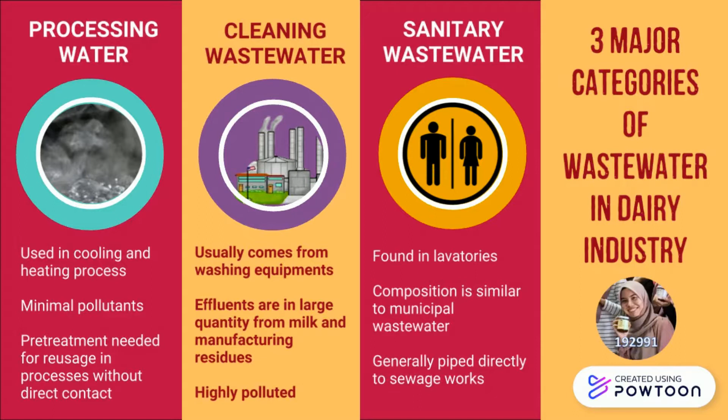The last category is sanitary wastewater. It is found in lavatories. Its composition is similar to municipal wastewater, and this sanitary wastewater is generally piped directly to sewage works. In this presentation, we are going to focus on the cleaning wastewater in the dairy industry.

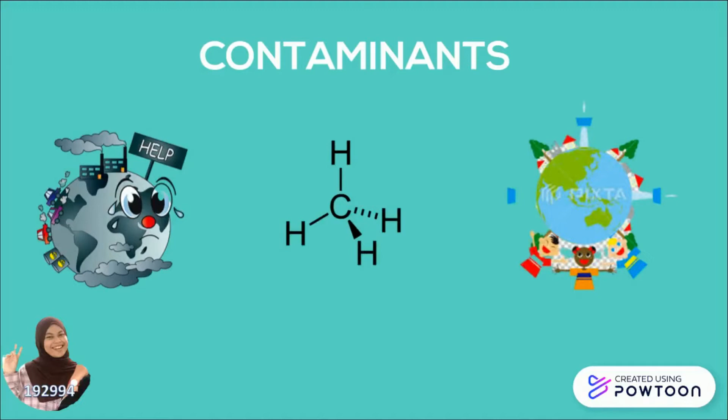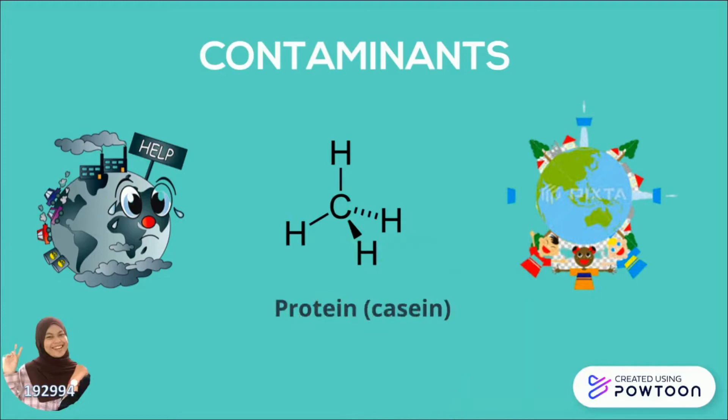Dairy industry is not commonly associated with severe environmental problems. However, we must consider its environmental impact, as dairy pollutants are mainly of organic origin. Waste from the dairy processing industry will contain high concentrations of organic material such as protein (casein), carbohydrate, lipid, and high concentrations of suspended solids.

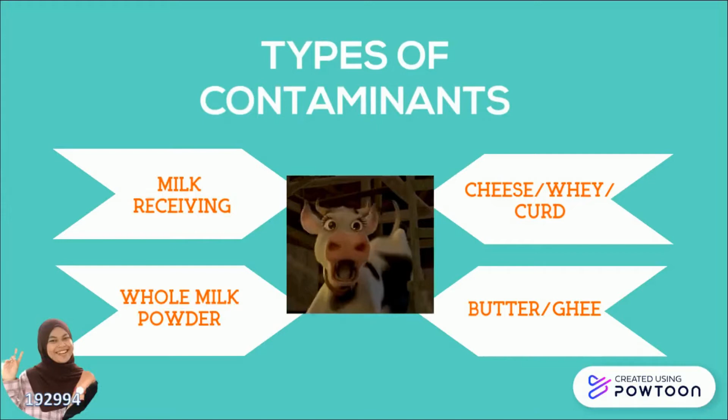Here are several types of contaminants from the dairy industry: milk receiving, whole milk powder, cheese or whey or curd, and lastly butter or ghee.

The type of contaminant can be sourced from milk receiving. It can result from tank, truck and storage tank washing, pipeline washing and sanitizing. It also contains milk solids, detergent, sanitizers and milk waste.

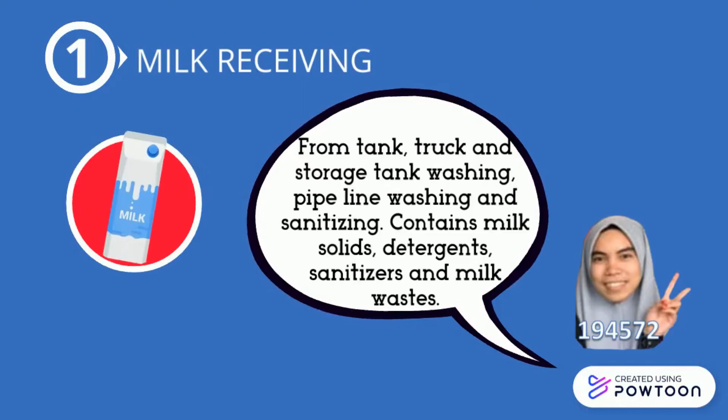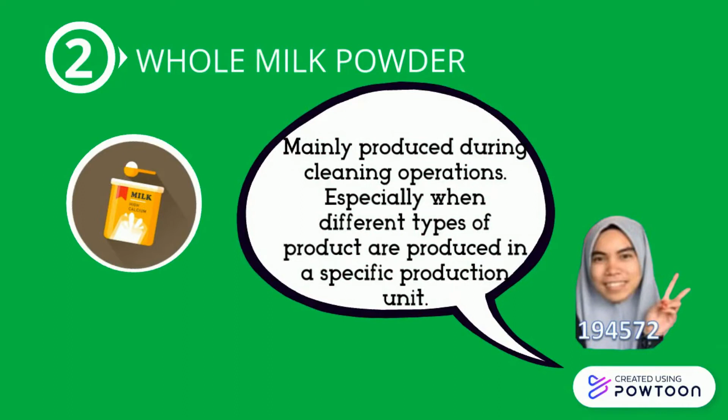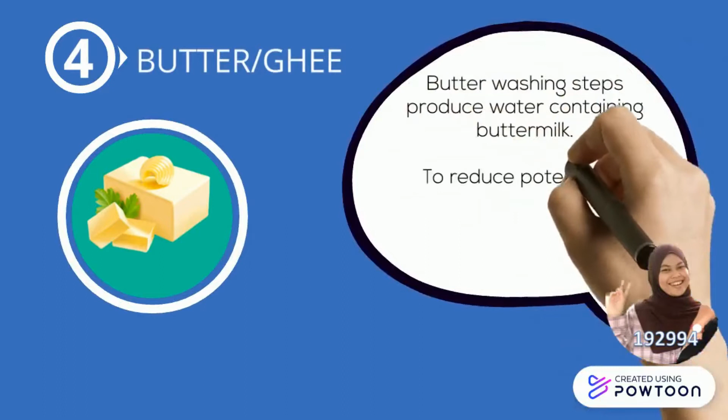Lastly, for butter or ghee, the butter washing step will produce wash water containing buttermilk. So, to reduce the potential waste load from butter or ghee, we can eliminate the buttermilk production and the washing step.

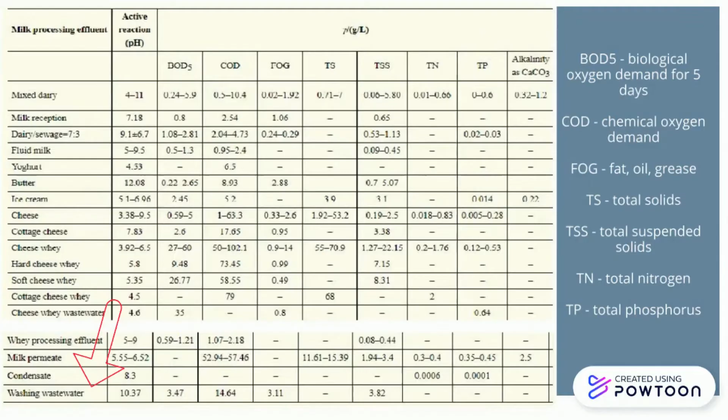Hello, I'm Akila and I will explain the on-site pre-treatment options in dairy wastewater treatment. There are four main points here: first, physical screening; second, pH control; third, flow and composition balancing; and the last one is fat, oil and grease removal.

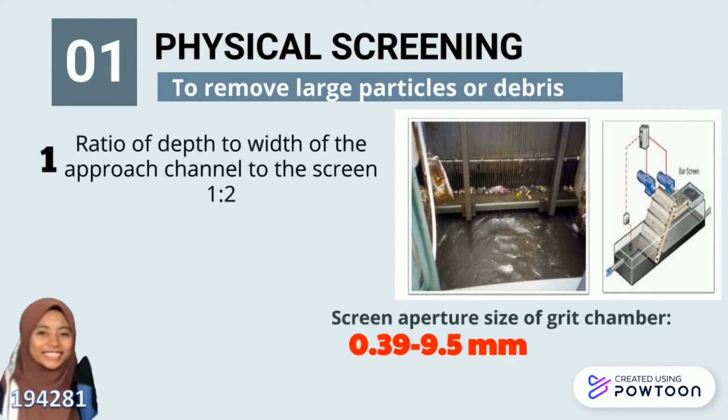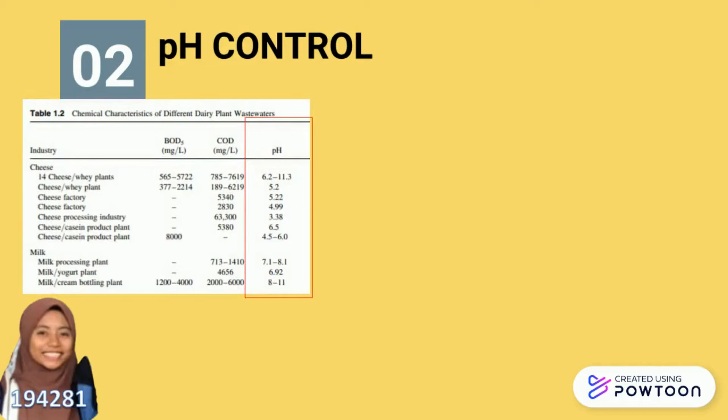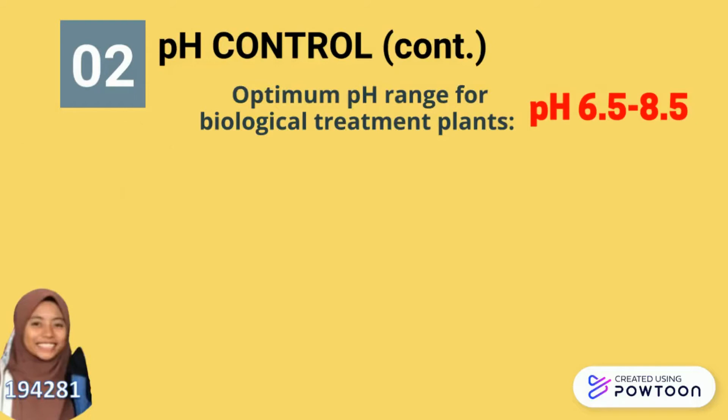As we can see in the table here, there are large variations in wastewater pH from different dairy factories. Therefore, different cleaning strategies can be employed, such as alkaline detergents and acidic detergents, and both have different functions. The optimum pH range for biological treatment plants is between 6.5 to 8.5, and if extreme pH is used, it will be detrimental to any biological treatment facility.

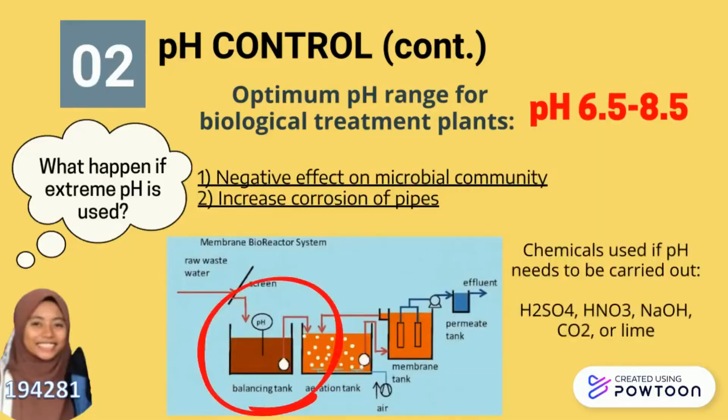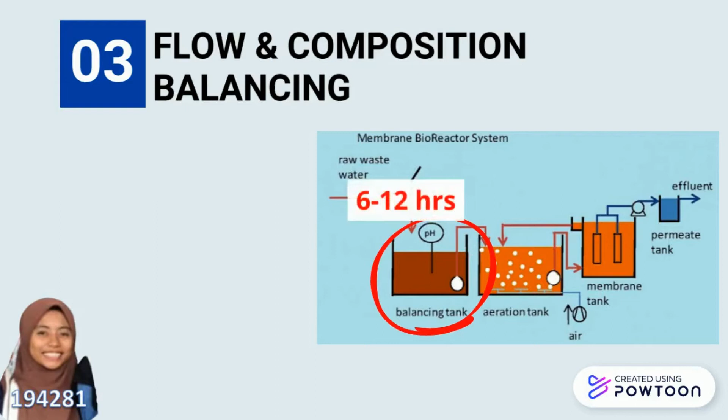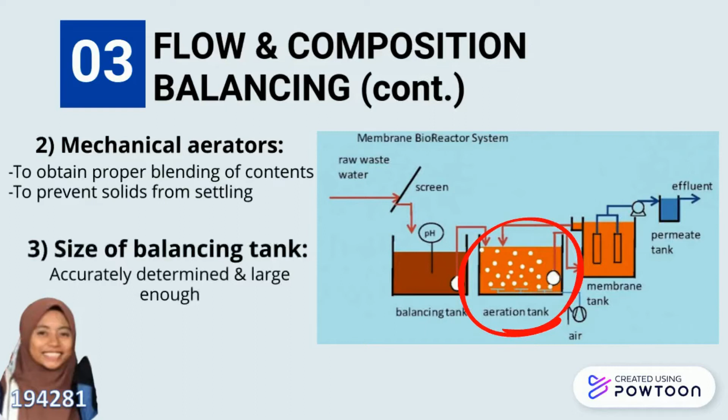Usually, flow balancing and pH adjustment are performed in the same balancing tank. This can be achieved by keeping effluent in the balancing tank for at least 6 to 12 hours. During this time, the residual oxidants will react completely with solid particles and neutralize the cleaning solutions. Besides, the usage of mechanical aerators is also important to obtain proper blending of content and to prevent solids from settling. Another critical factor is the size of the balance tank, which should be large enough to handle a dairy factory's daily flow pattern at peak season.

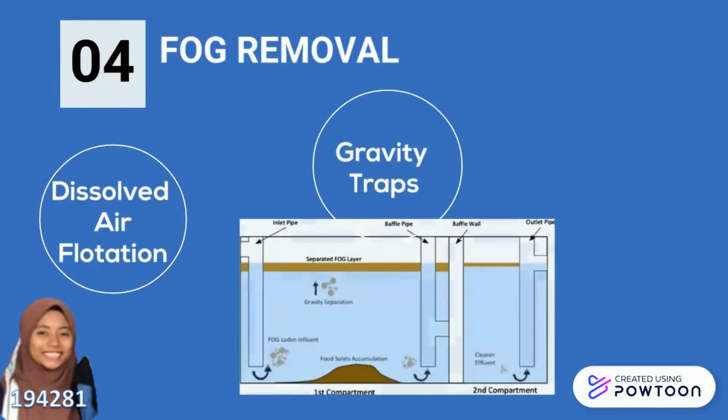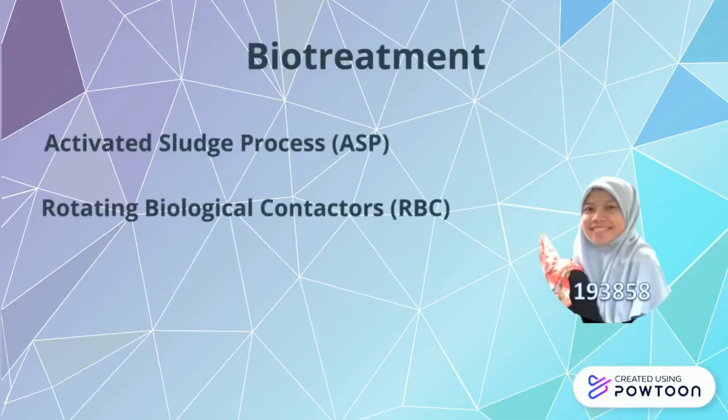The last pre-treatment option is FOG removal. FOG can be removed by three systems: dissolved air flotation, gravity traps, which use gravity separation to remove the FOG layer, or enzymatic hydrolysis. Dairy wastewater is generally treated with biological methods such as activated sludge process, rotating biological contactor, sequencing batch reactor, and continuously stirred tank reactor.

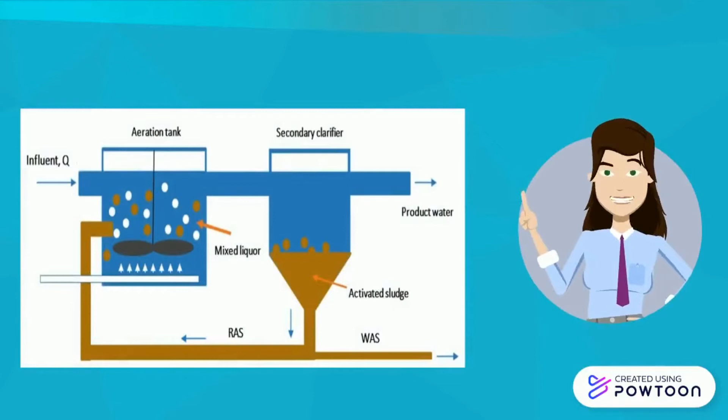First, let me explain about activated sludge. In activated sludge reactor, aeration and mixing can be provided by pumping air or oxygen into the tank. The microorganisms oxidize the organic carbon in wastewater. The floc formed in the aerated tank can be removed in the secondary clarifier by gravity settling. Some of this sludge is recycled from the clarifier back to the reactor.

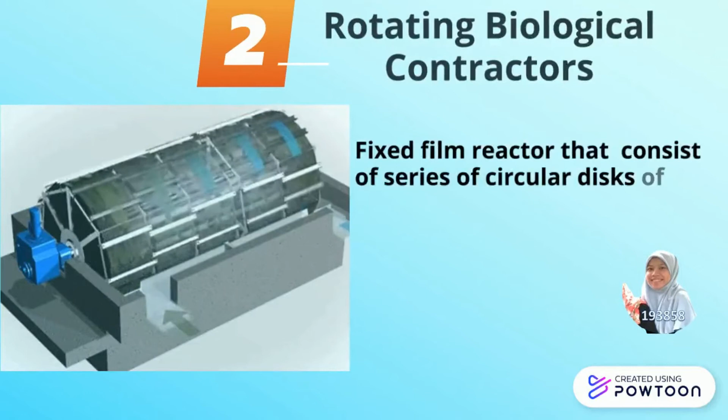RBC is a fixed film reactor that consists of a series of circular discs of polystyrene or PVC. The function of RBC is to reduce organic matter. The microorganisms present on it will absorb organic matter when they are in water, and obtain the required oxygen to grow when they are out of the water.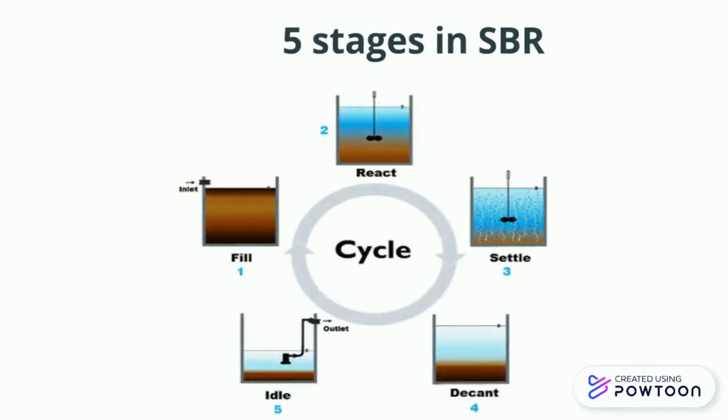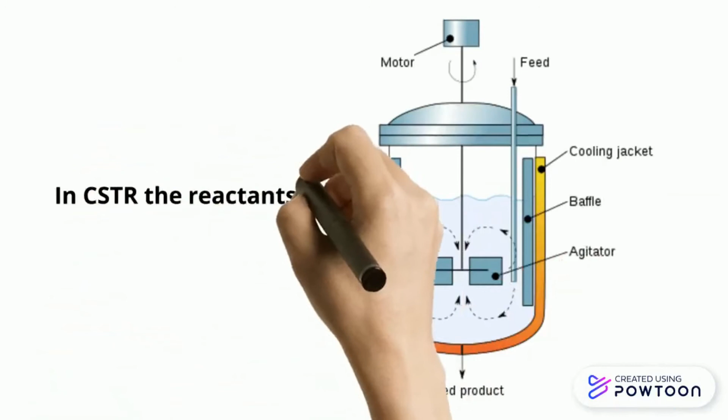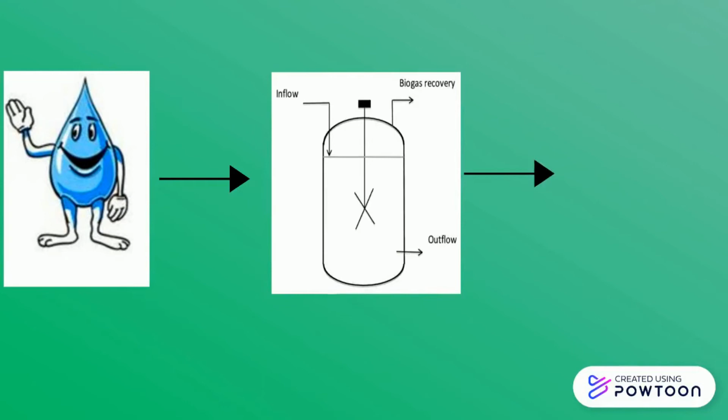Lastly is the continuously stirred tank reactor. Liquid waste stream enters the reactor and is treated by anaerobic suspended bacteria. The majority of the solid is converted into biogas, which reduces the solid concentration in the waste stream.

Here are the comparisons of biotreatments.

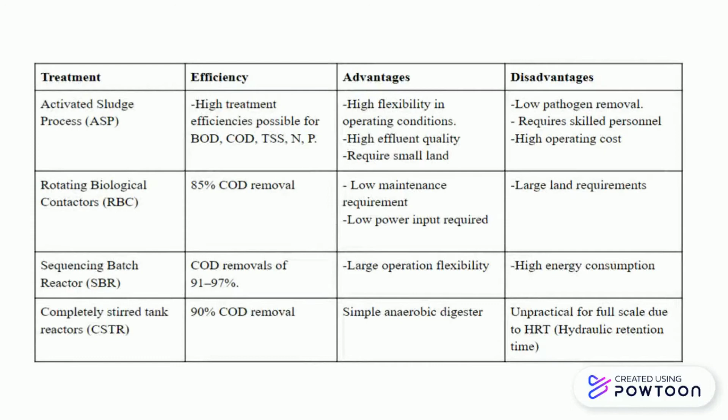Moving on, we will take a look at other treatments done in dairy wastewater. The first one is land treatment.

Interest in land application of waste is also increasing as a direct result of the general move of regulatory authorities to restrict waste disposal into rivers, lakes, and the ocean.

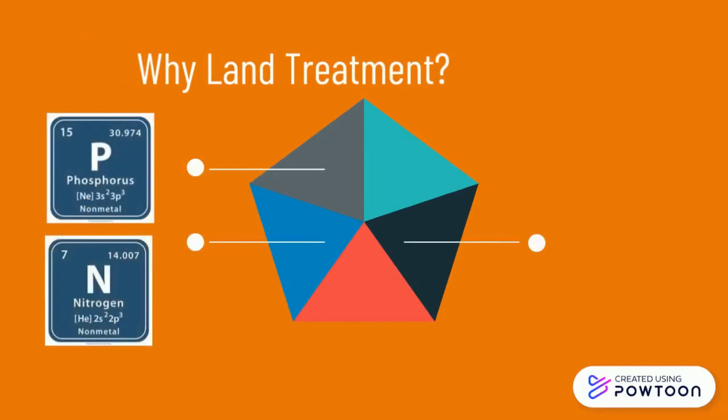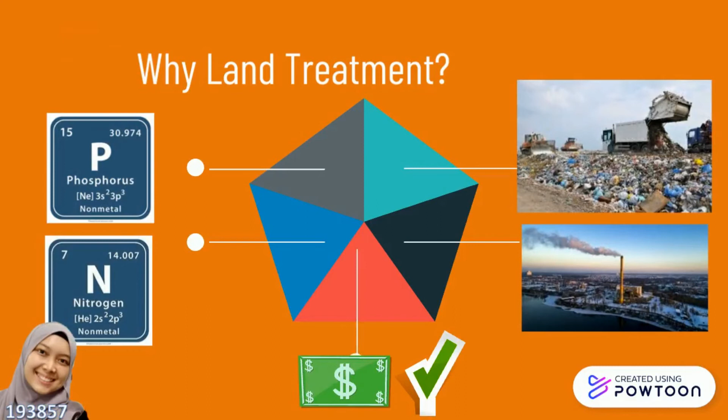There are a few reasons why land treatment is the preferred method in treating dairy wastewater, such as nutrients like nitrogen and phosphorus contained in biodegradable processing wastewater, which make these wastes attractive as organic fertilizers. Also, the high cost of incineration and landfilling makes land treatment the more economical, environmentally friendly method.

The last but not least is irrigation. Irrigation is an action to supply water to land or crops to help growth, typically by means of channels.

Considerations on the condition of the wastewater have to be taken. For example, suspended solids in the wastewater can cause nozzles to be clogged and render the soil impermeable.

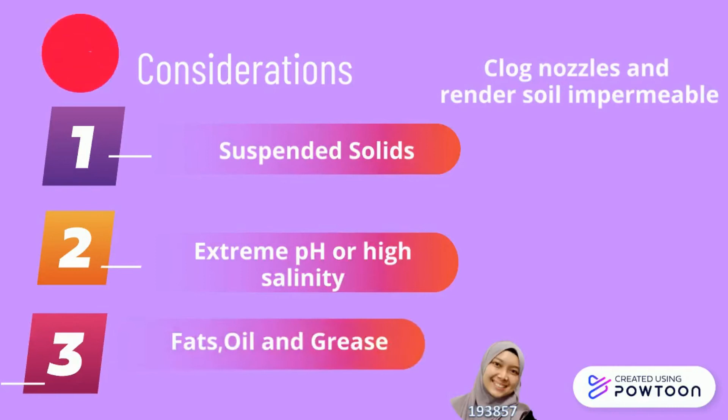If the wastewater from the dairy industry has extreme pH or high salinity, it will lead to soil dispersion, a condition in which the soil is vulnerable to erosion. And lastly, fats, oil and grease contained in the wastewater may be resistant to degradation.

Preventive measures can be taken to reduce water consumption and contaminants in dairy wastewater. Collect and reuse the wastewater for lower grade products, such as in animal feed.

Segregation of effluents from sanitary installations, processing and cooling systems helps facilitate recycling in wastewater. Regular maintenance of fittings, valves, seals and equipping fillers with drip and spill savers helps reduce spillage and prevent build-up of milkstone deposits.

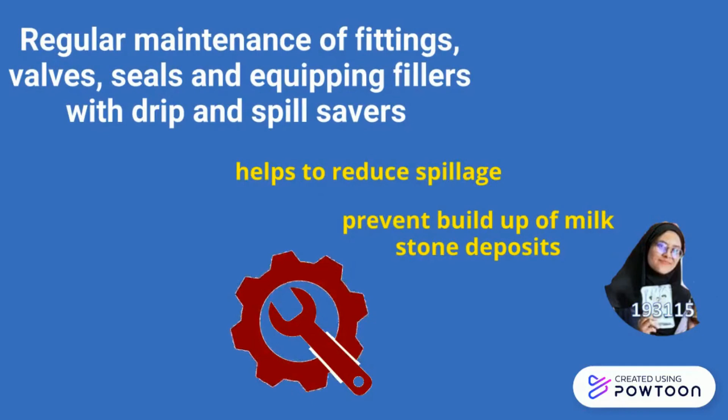Make sure to run the operation to specified length to prevent blockage in tubes, high pollutant load, and time-consuming cleaning.

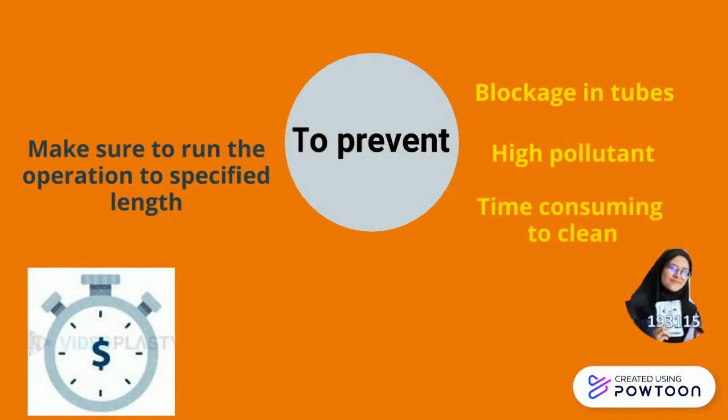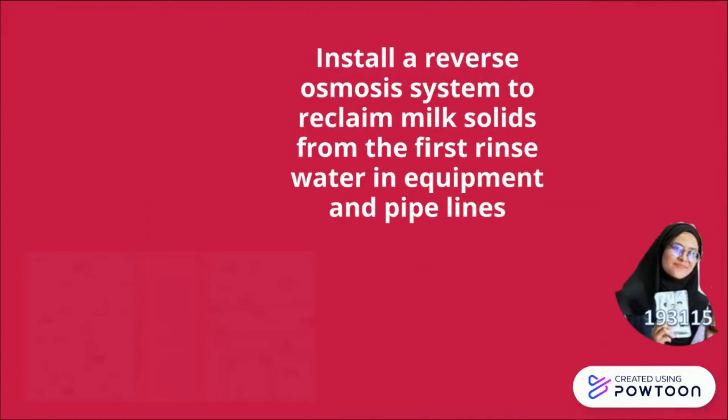Treat solid residue as solid waste instead of flushing it down the stream with water. Install a reverse osmosis system to reclaim milk solids from the first rinse water in equipment and pipelines.

An example of prevention in butter production is scraping manually to the accessible area after production, which helps reduce the amount of cream and butter from entering the wastewater stream.

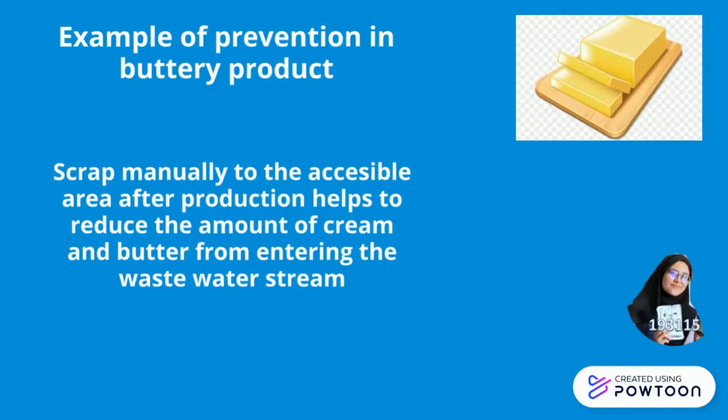In conclusion, dairy processing plays a big role in contributing to the source of wastewater. Dairy wastewater is white in color and has an unpleasant odor and turbid character.

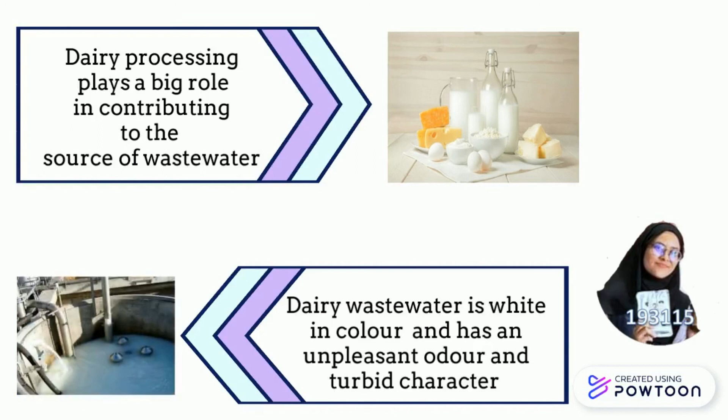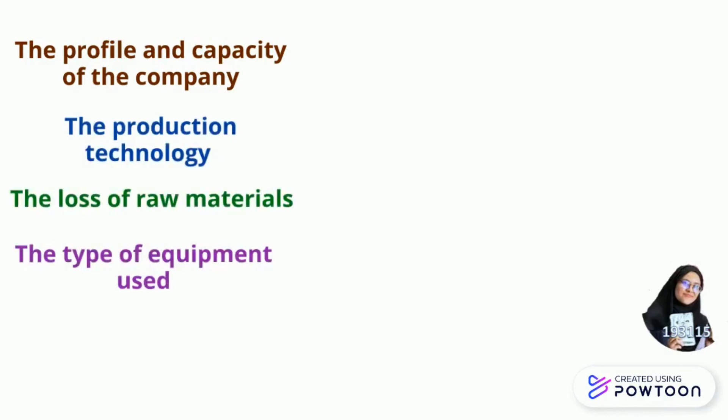The profile and capacity of the company, the production technology, the loss of raw materials, the type of equipment used, and the degree of wastewater reuse influence the concentration of polluting dairy effluent.

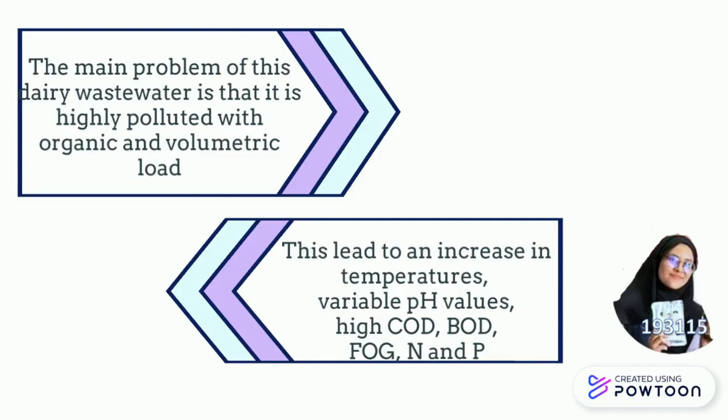The main problem of dairy wastewater is that it is highly polluted with organic and volumetric load, and this leads to increased temperature, variable pH value, high COD, BOD, FOG, nitrogen, and phosphorus.

So the drawback of dairy wastewater is that the sewage pipe might be clogged due to the high concentration of settleable solids. It requires periodic cleaning with appropriate chemical and bacterial preparation, which contributes to the high cost in manufacturing.

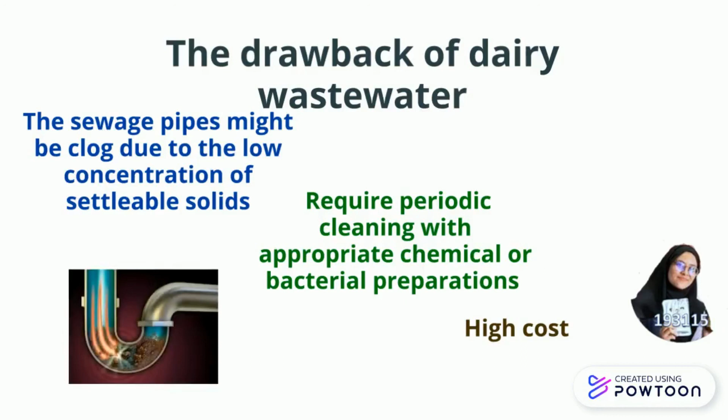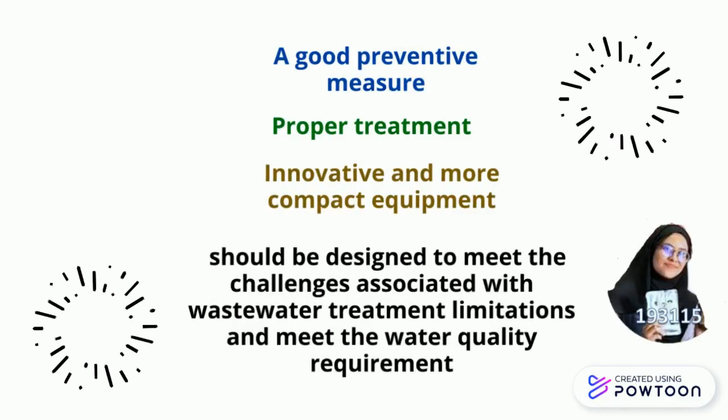A good preventive measure, proper treatment, and innovative and more compact equipment should be designed to meet the challenges associated with wastewater treatment limitations and meet water quality standards.